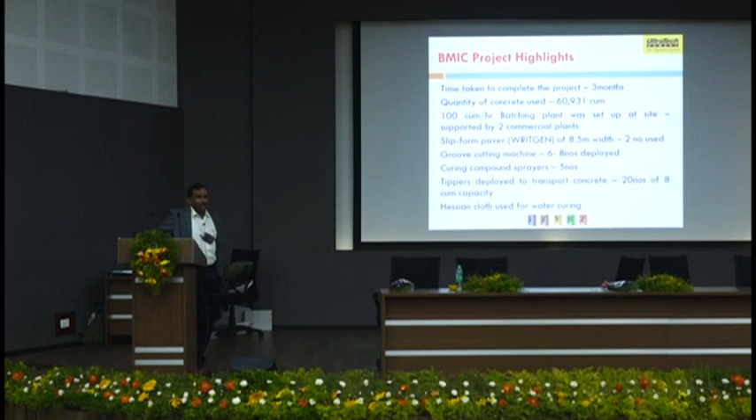We poured about 60,000 cubic meters of concrete in 90 days for the entire road, which is 90 lane kilometers. And it is the only road which was designed for 60 years.

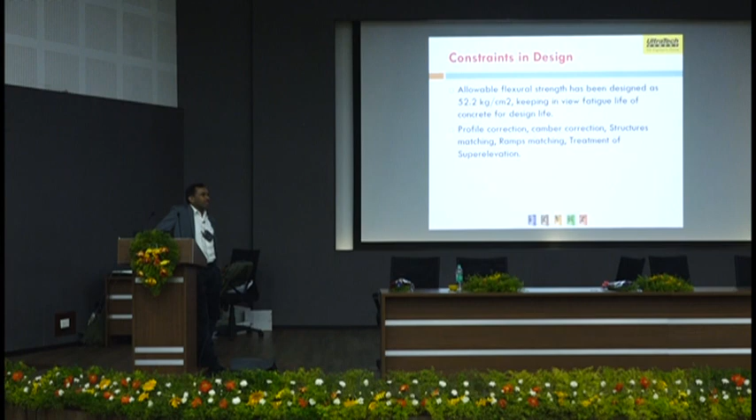Why can't it be 100 years? That should be your thought process. Why should we conventionally just follow what's written in the code or guidelines, design a concrete road for 25 years, and say I will go with 25 years? No. Why can't it be 50 years? What is the shortfall in the design? Can we support that and redo it? If you design for 200 years, whether I will be here or not, I will ask our children to look at it. Then I will also tell my children to tell his children to look at that. That should be the thought process. That is how you make it more sustainable.

From the Stone Age till date, there is a cycle track, a pedestrian track connecting the village. It was just gradually widened for cycle, two-wheeler, four-wheeler, 1.5 lane, 2 lane, 2 to 4 lane, 4 to 6 lane. Now people are working on expressways with 8 lanes.

This is how it happens gradually. Very rarely are new roads built, unlike new cities in India. Very few, 2-3 cities are newly built in India. One is Chandigarh, the other is New Raipur. Where else? I don't see any cities which were newly built.

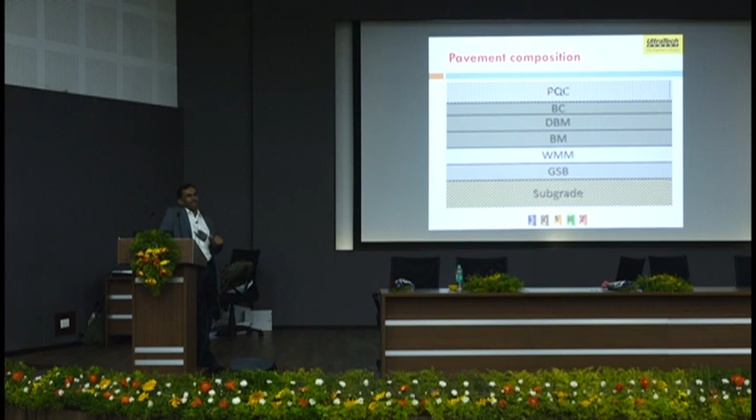It was all expanded. Bendakaluru became Bengaluru, Bengaluru became a smart city or whatever you call it, garden city, IT city - all these things. That's how growth has happened in the country. We should see that as a strength - we haven't gone for new things, we handled the entire earlier villages. We saw the conversion happen along with us. We haven't left out anything - our practices, our heritage, or our culture. See, it has been built. We have to carry all those things when the change is happening too.

That's how it was - you see, I'm just putting PQC, nothing else. Instead of an overlay, I am putting one more PQC. You just have to believe in your product. I believed in my concrete, without reinforcement, without anything. I told you to put it. I took a lot of risk.

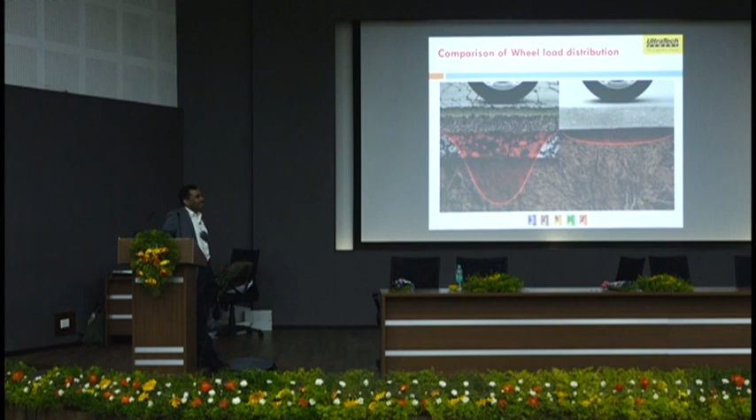This is our stress distribution. We asked the IITs, some colleges, to study this. Right now this project is being studied by IIT Kharagpur - Dr. Amarnath Reddy is working on this.

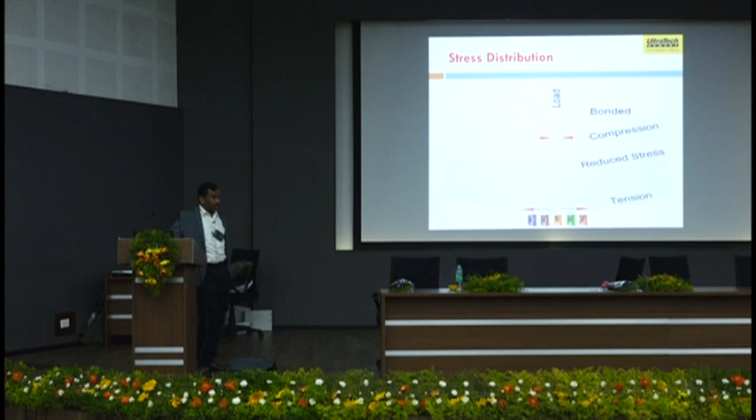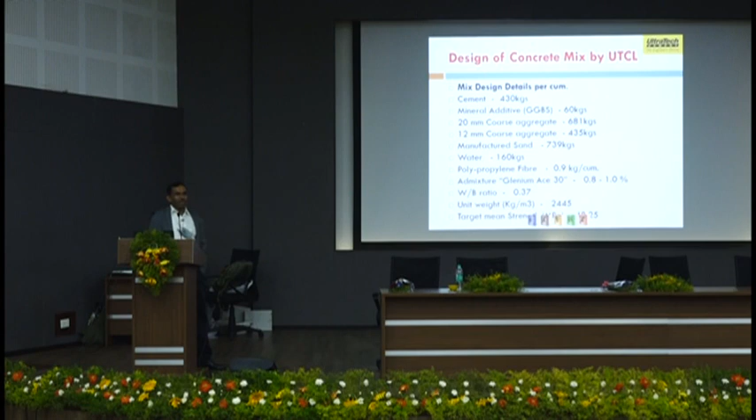These are the mix designs. Again, there is a lot of restriction on department people not using PPC and such. Let us exploit what new material is coming into play. When a new model comes, I will leave the old model of the mobile behind - certainly I will leave it. S7 comes, S6 is irrelevant for me, nobody wants to look at it, you feel ashamed to show it to somebody. I got S6 because S7 is in the market. But here we want to stick to 450 kg minimum cement content, water cement ratio - everything we want to lock in for around 100 years.

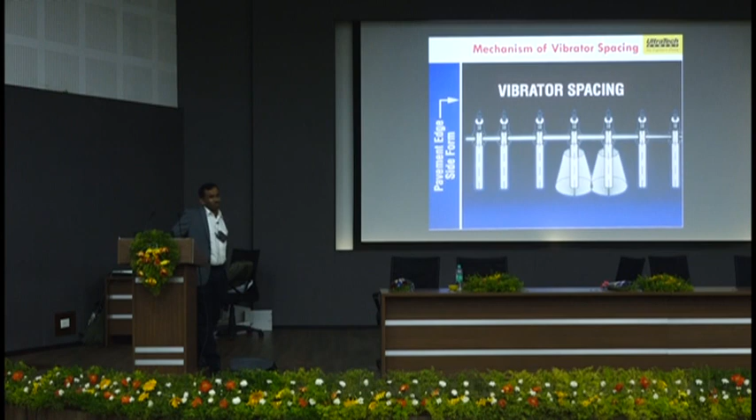It's a huge machine. I'll have something to ask Narayan afterwards - just observing this machine, I'll ask the questions afterwards. This is a general discussion; I was thinking of something different actually.

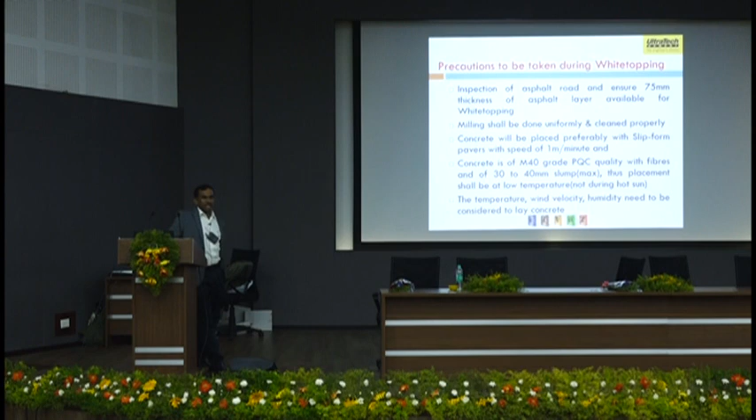This again is cost; it is almost a cost comparison. These are the precautions when you are doing the roads. They are general precautions. Once you handle M40 grade concrete, which is not a normal grade concrete, which is PQC, pavement quality concrete, it has very low slump. If you allow it to wait, just delayed for half an hour, it becomes hardened there itself, because you don't have the workability at the place of delivery.

It's a precaution you have to take, and see the condition of the weather and other things while laying, because it's an open area; you cannot cover it, unlike slabs. It's very difficult to handle. That's how you have to do that.

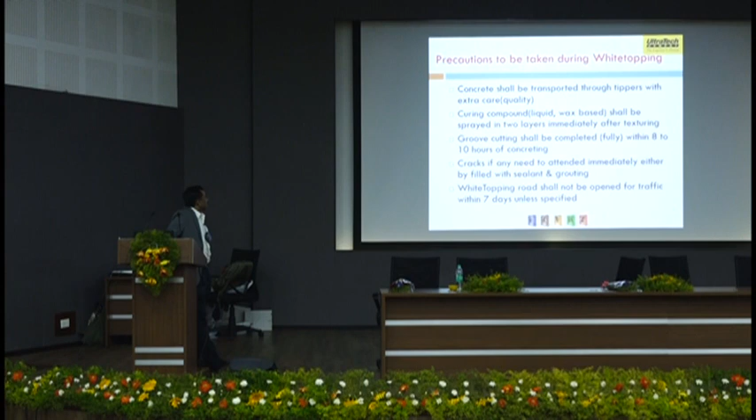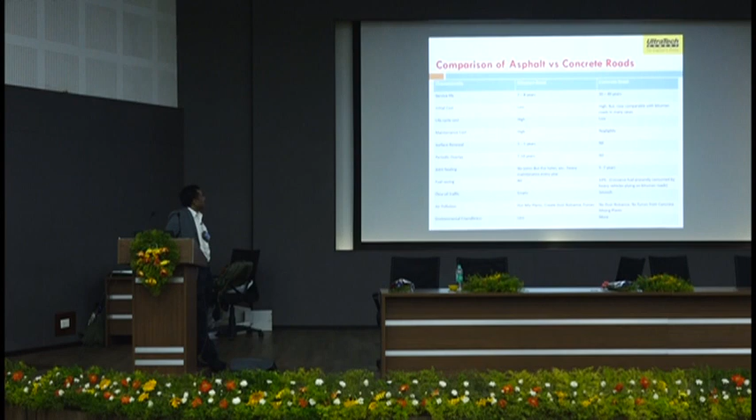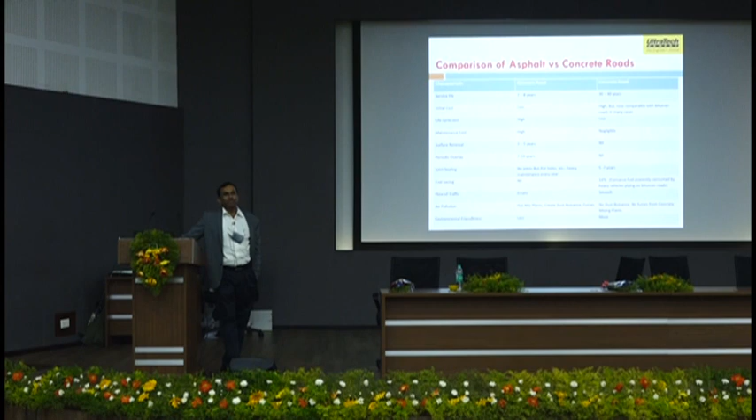This is again a comparison of some of the parameters: initial cost, maintenance cost. Vehicle damage cost is very high when roads are bad. In fact, in Bombay, there is a recent study. There were more abortions, and aged people got back pains, due to the bad condition of the roads, because they use Olas, two-wheelers, four-wheelers, and they are in a hurry to reach their offices.

Young boys and girls who are newly married don't get any advice from their parents, because the parents live away from their houses. These people don't know what to do and what not to do, and there are plenty of cases where they could not trace the reason, because they eat well, they go to the gym, they are physically fit. Why is it a miscarriage? Potholes and these bad road conditions are leading to this social problem.

I was surprised, being party to that, now struggling here and there with all the corporations to convert these roads into concrete roads, or at least usable roads. Again, concrete roads may not be very good, because we don't have the skills to make them good right now; very few people have the skills. But it is an issue.

And after 60, 70 years, somebody uses autos. Once it jumps into a pothole and comes out, the old man gets more damage to his back. These issues are more critical in cities, especially Mumbai and mega cities, where there is always waterlogging every rainy season, backwater, high tide, and the whole sea water comes and opens up the drainage, again creating a lot of issues.